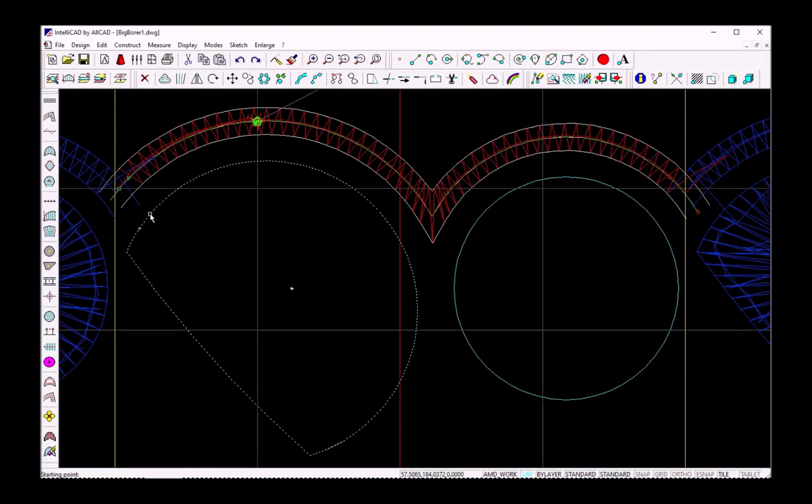I select the boundary, then the center point, and I specify the starting point of the cleaning stitches on the boundary. To move the stitches closer to the center of the hole, I just increase the stitch length.

I continue with the circular hole, which can be generated with the fixed shape hole function. I activate circle and launch again the parameter menu. I define the same parameters, 2 layers, density 1.4, second density 4.5, shorten stitches by 2 mm and stitch length 9 mm.

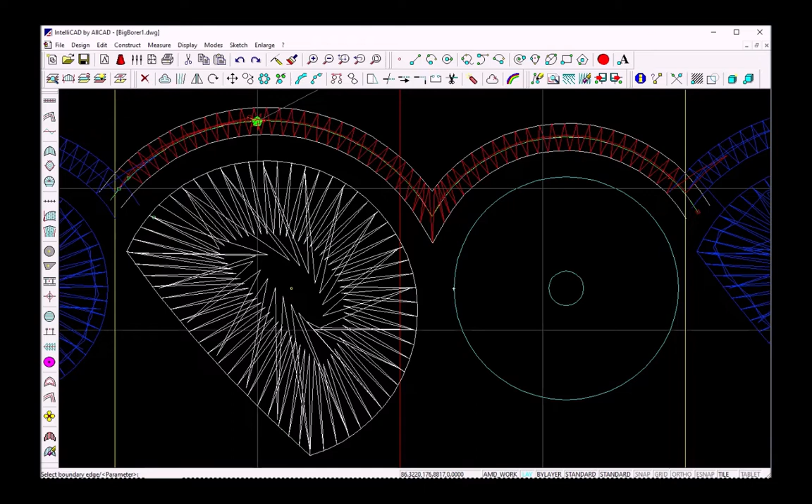I activate select boundary and select the boundary at the position of the starting point. Next I can add underlay. I define an offset from the boundary of 1.5 mm, a stitch length of 3 mm, set the number of layers to 2 and increase the shuttle pull compensation to 0.3.

Finally, I just click on the cleaning stitches. Repeat the command for the second object. Now only the borer stitches are still missing. I set the stitch length in to out to 1 mm, out to in to 12 mm, and I select the borer size of 12.

I have to define the center and the corner stitches, and the system divides the stitches according to the settings in the menu. I divide the first hole in 3 sections: center section, upper and lower part. Select the center point, corner stitches, and I confirm. As you can see, the stitches are divided. The circular hole can be done with just one part.

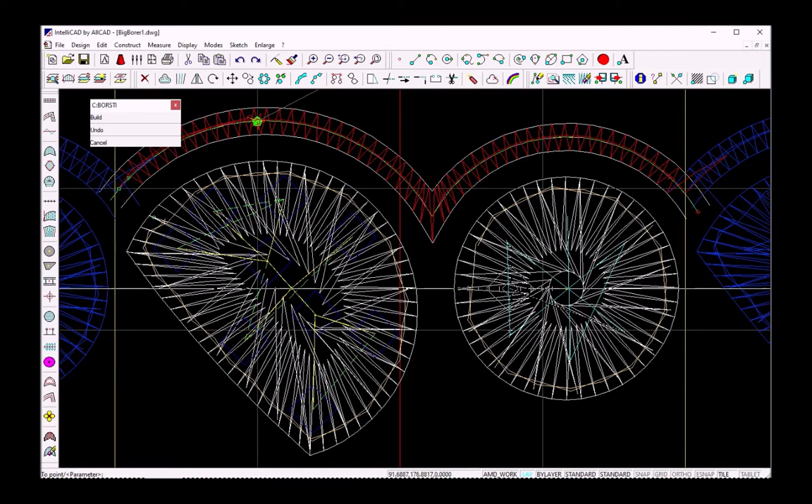The holes are prepared and I can connect the single embroidery objects. Therefore I launch the punching command and connect directly the end of the already punched part with the underlay of the first borer object. At the end I activate the borer

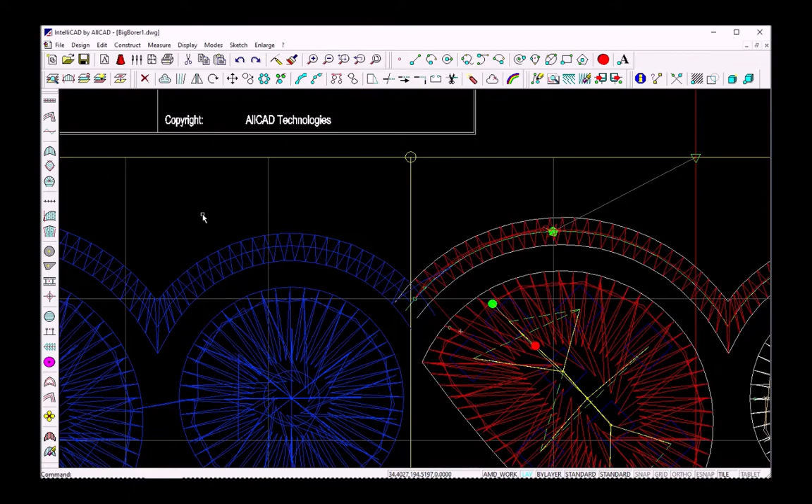and connect with the center borer stitches, followed by the upper borer stitches and the lower borer stitches. Deactivate the borer and connect with the cleaning stitches. The first hole is punched, but the circular hole on the right side is still missing.

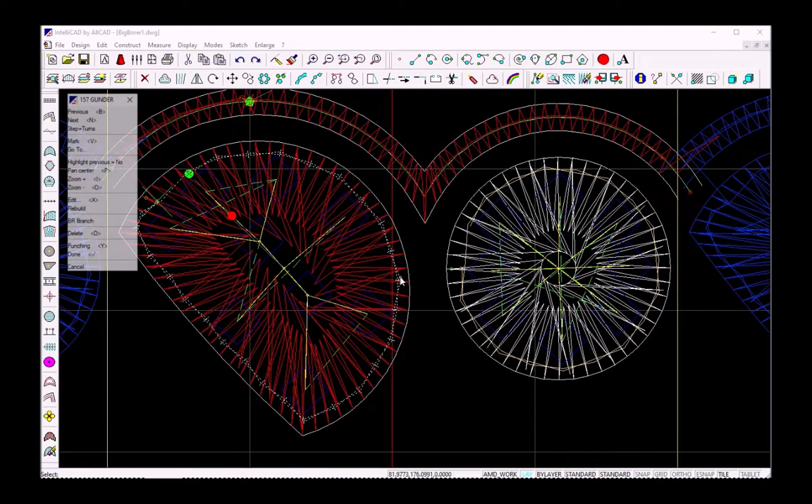I want to cross over from the underlay of the first hole, punch the circle and then continue with the underlay of the first hole. This can be achieved by simply adding a branch function at the desired position. I continue punching. The system will stop at the branch and allow me to punch the circular borer before continuing with the underlay of the first borer.

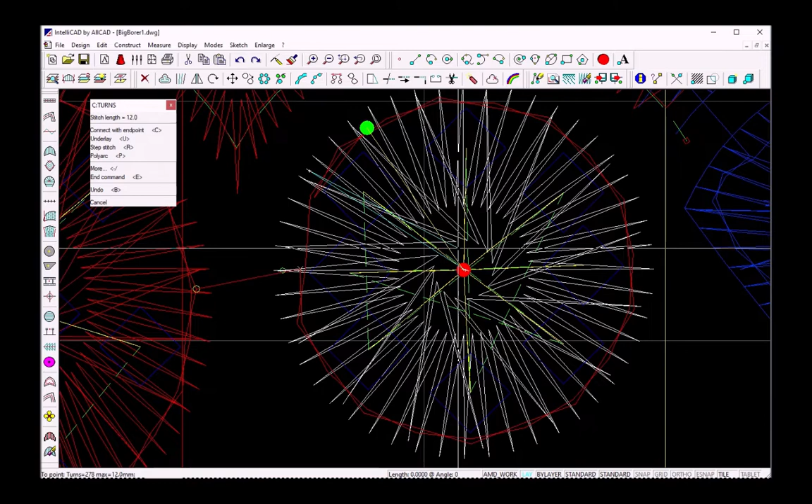Borer on. Connect with the borer stitches, borer off, and connect with the cleaning stitches. At the end I can connect with the branch. I arrive at the end of the first borer and can continue with the corner stitches of the edge.